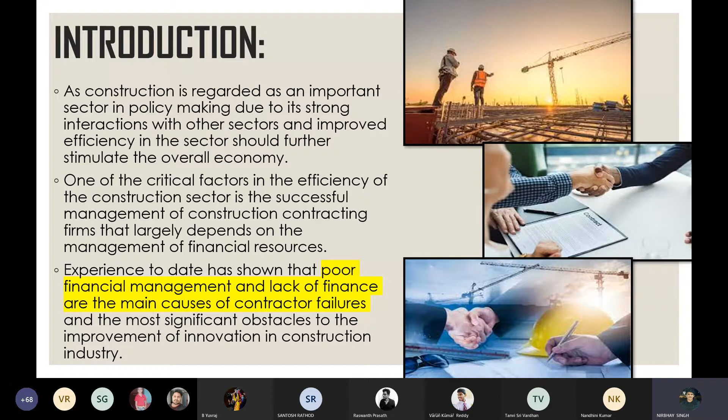As we all know, construction is regarded as an important sector in policy making due to its strong interaction with other sectors. Improved efficiency in a sector should in theory further stimulate the overall economy. One of the critical factors in the efficiency of construction sector is successful management of financial resources. Experience through various researchers shows that poor financial management and lack of finance are the main causes of contractor failures and the most significant obstacle to improvement of innovation in the construction industry.

Main external factors and internal capital sources in construction sector are debt and equity. Equity consists of funds subscribed in a project by shareholders and of retained profits. On the other hand, debt is mainly provided by commercial banks through instruments such as short, medium and long-term loans.

In research, it was found that financial sources in construction sector are limited compared to other sectors. They say that the risk of financial sources is less in construction industry, but on the contrast, some argue that construction has a higher average than other industries.

Why is it failing and what are the problems? There is a critical point: if a company does not make a profit, it will most likely fail. However, whether it makes a profit or loss, if it does not have a positive cash flow, it will absolutely fail. Why is that statement correct, and how are these problems affecting construction contracts management?

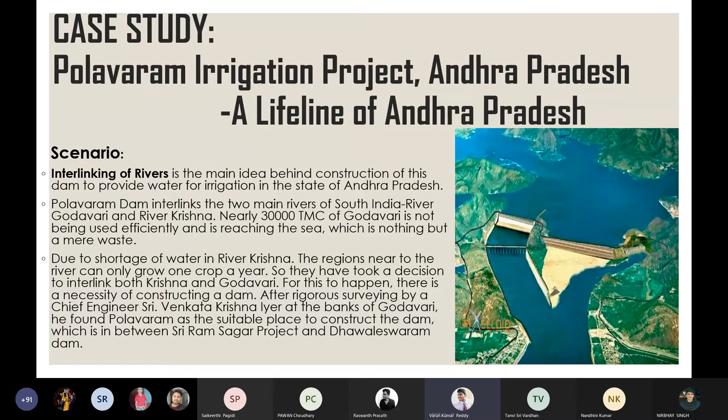After the construction of this dam, the aim is to transfer water mainly from the Godavari to the Krishna and flood all the low-lying areas to have water. In the year 1941, a chief civil engineer named Venkata Krishna Iyer surveyed a lot about a place in order to find the best site to construct a dam on the Godavari river.

He was able to identify one suitable place, that is Polavaram, which is 50 kilometers upstream to Dhawaleswaram project. Except this place, he couldn't find any other place on Godavari suitable for the construction of a dam.

Now we will look into the dam details. Till now, in any part of the world, dams are generally of one kind, but this dam is specifically of another kind. It is being constructed a little away from the original river course.

It has three main parts: the main dam, also called the spillway, the earth-cum rock-fill dam, short formed as ECRF, and canals. The spillway length is 1.1 kilometers with a total of 48 gates. Once the direction of the river is altered, the original river course is obstructed with the earth-cum rock-fill dam. This ECRF dam will not have any gates, it's just like a wall.

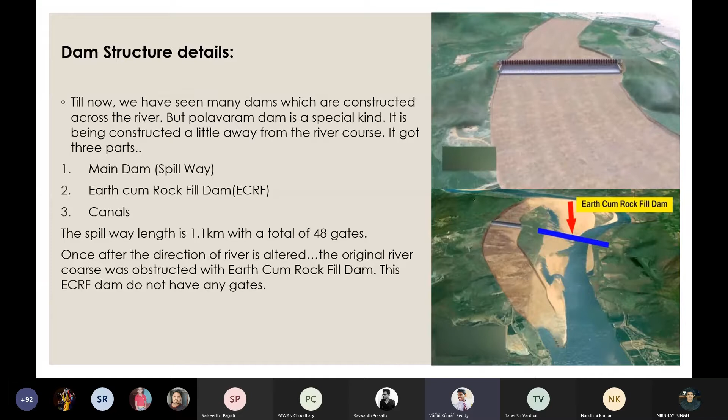Yeah, nearby, can you change the slide? Yeah, Nirbhay. I have changed it. Yeah, I got it now.

They decided to construct this dam at Polavaram. The estimated cost of this project was about 6.5 crores in the 1940s, as discussed earlier by the chief engineer named Iyer. It was named the Ramapada Sagar project in the early 1940s, but due to lack of funds, construction did not start at that time, and later it was renamed the Polavaram Irrigation Project.

Finally, in the year 2004, the then Chief Minister of Andhra Pradesh, Dr. YSR, started thinking of this project. The project estimation in 2004 was around 8,200 crores, which we can approximate to nearly 10,000 crores. The state government decided to build the project on its own.

They started canal works in 2004 and dam construction works in 2005. The dam construction came to a halt in May 2006 because the state government had not obtained clearances from the forest department and various other departments. Construction stopped until 2009, with only canal works completed. By 2009, the state government had obtained clearances from all the departments.

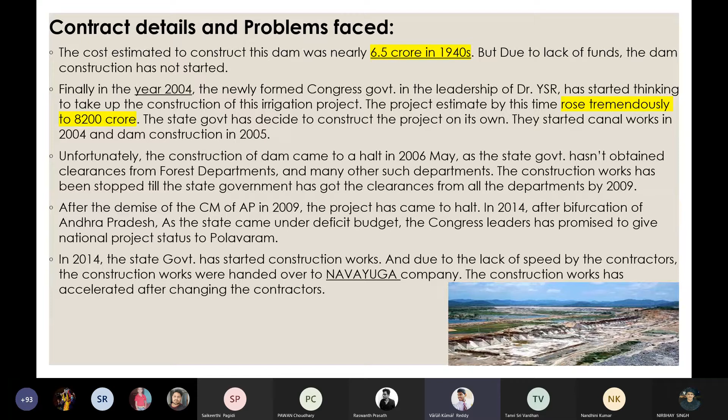In 2014, dam construction began after the bifurcation, and in 2015 the construction works were given to the Navayuga company, because the previous contractors were not working efficiently. The project construction accelerated after changing the contractors.

The spillway's length, as discussed, is 1.1 kilometers with a total of 48 gates. After the direction of the river is altered, the original river course is obstructed with the earth-cum rock-fill dam, which acts like a wall and doesn't have any gates. In the ECRF, once constructed, we can store water in the main dam. Otherwise, during floods, the water won't get stored in the spillway but will flow in the original river course direction, toward the ECRF dam. So to construct the ECRF dam, we should stop water coming in the river course direction, and only then will we be able to construct the dam.

To obstruct water for constructing the ECRF dam, coffer dams are constructed in the upstream and downstream. These coffer dams are just temporary structures that will be removed after the completion of the construction of the ECRF dam, which is an earth-cum rock-fill dam.

The reason for construction of the coffer dam in the upstream is to obstruct water from upstream, and the reason for construction of the coffer dam downstream is to obstruct water from the downstream through the sand. As the sand is pervious, water will seep through it and cause disturbance during the construction of the ECRF dam.

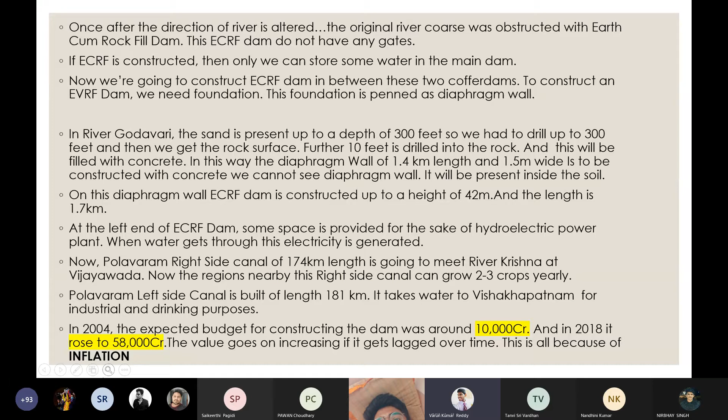In 2004, the expected budget for constructing the Polavaram Dam was 10,000 crores. Now in 2018, the budget has been drastically increased to 58,000 crores. The value gets increased every year as it becomes late, probably due to inflation.

Inflation plays a key role in estimating the cost of the project. Earlier, in the 1940s, it was nearly 6.5 crores, near to that. In 2004 it became 8,200 crores, and now in 2018 it has reached 58,000 crores.

Probably this is due to inflation and the cost increase in cement, cost increase in sand, and cost increase in labor. Each and everything has determined the increase in this amount of rate.

Now, the final proceedings after the 2019 elections: the state witnessed a new political party and the dynamic leadership of Sri Y.S. Jagan Mohan Reddy. It introduced a new version, that is reverse tendering, citing that the previous government had done many scams in the construction of the Polavaram project during their 5-year term, from 2014 to 2019.

After the reverse tendering, Mega Engineering Infrastructure Limited, in short MEIL, bagged the reverse tender with an offer of 4,358 crores, which was 12.6% lower than the previously cited bid of 4,987 crores.

The Polavaram project is intended to stabilize the ayacut and water supply for 2 crops a year, a maximum of 2 crops in a year. The project proposes to supply irrigation water for 7.2 lakh acres.

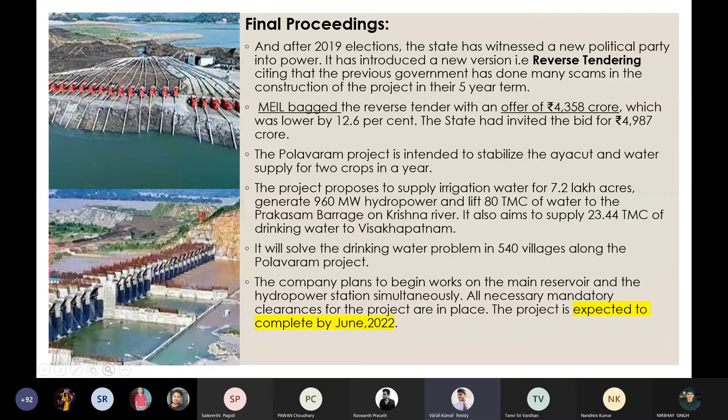Helps in irrigation. Already 23 lakh acres which are already getting irrigation water will now get adequate water for their crops. 80 TMC of water is being transferred to Krishna river and 23 to Vizag and nearby areas.

River Godavari has flooded at least once in 30 years. After construction of this dam, this dam has held all the flood water irrespective of the size of flood it got. The world's biggest dam, the Three Gorges Dam in China, has a capacity of 47 lakh cusecs of flood water, and this Polavaram project has a capacity of 50 lakh cusecs of flood water. That means it's more than that of the Three Gorges Dam.

Nearly 33,000 crores is required for rehabilitation and resettlement of people before construction of this project. And after completion of the project, even a drought of 4 years for Andhra Pradesh will have no difference in the water requirement for the state of Andhra Pradesh.

And now my friend Praneeth will discuss the summary and so on. Thank you.

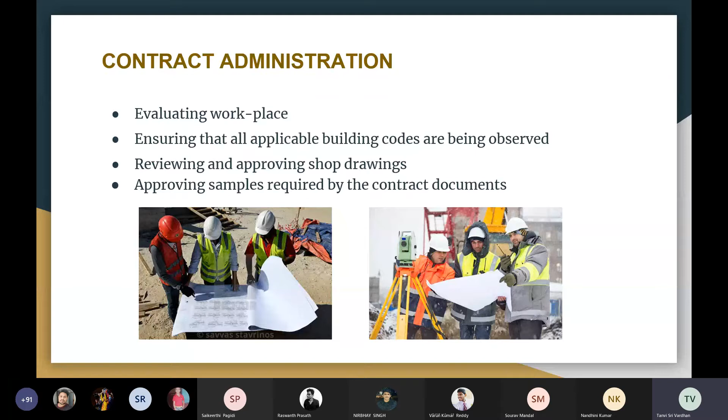Then approving and providing the samples and materials required as per the contract documents. Then reviewing and commenting on the changes made, refining the plan in a better way. Next is reviewing and amending the contractor's monthly requisition payment, fixing this up and then applying for payment. A payment application is a document that a contractor submits to get paid for their services.

Then in the process, obviously some issues may arise and changes have to be done, and all these changes have to be documented. That's what a change order does. A change order is a document that shows changes to the scope of work and the cost associated with the change. The owner and the contractor both must sign the change order, because the application will reflect the change in work and cost. Including the change orders gives the contractor and the owner a quick reference point to confirm that the money figures in the application are correct.

Next is periodic on-site visits during construction, conducting regular meetings with contractors, vendors, and subcontractors, looking over the progress, and keeping records up to date about all those changes made. And reviewing and commenting on contractor-proposed changes to the contract documents, which may increase or decrease the contract sum.

Next is supervising the project, ensuring that clients get the technical quality they expect and the project goals are met, and ensuring compliance with all guarantee and warranty requirements. We all know that guarantees and warranties emerge as a means of safeguarding the rights of customers. These are legal instruments, and with the strength of guarantees and warranties, the seller or manufacturer is liable to face judicial courts if they fail to fulfill the guarantees and warranties. They include information about free repairs, service information, and legal recourse.

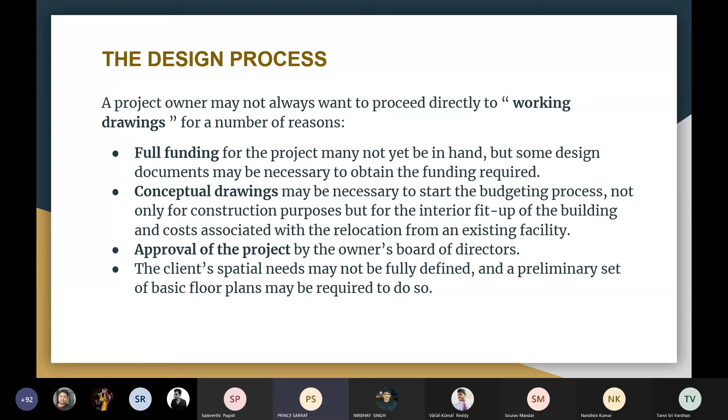Now I'm going to tell about the owner's role in the design process. An owner should take an active role in the design process to provide the design professional with the information they require to develop the project design. Some owners may not have experience in interpreting a two-dimensional design, all those lines on the drawing. If that is the case, ask the architect to explain which are which on the drawings.

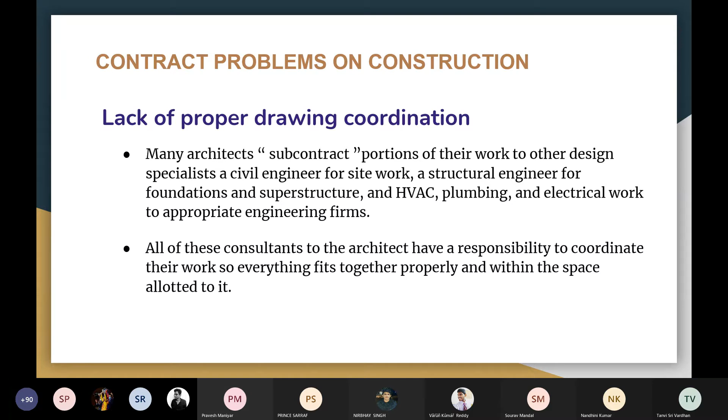Let us take a 14-story residential apartment building, where the architectural drawings had not been properly coordinated. The structural drawings of the post-tension concrete slabs on each floor, prepared by the structural designer, contained overall floor dimensions that differed from the architectural drawings. The edge of the concrete slabs on each floor extended beyond the facade of the building. Clearly, this is an example of total lack of coordination between architect and engineers.

These errors spilled over to the mechanical and electrical trades, since all of their vertical shaft openings, designed to carry electrical conduits, air conditioning and heating ducts, water lines, and fire protection lines, were designed according to the architectural drawing.

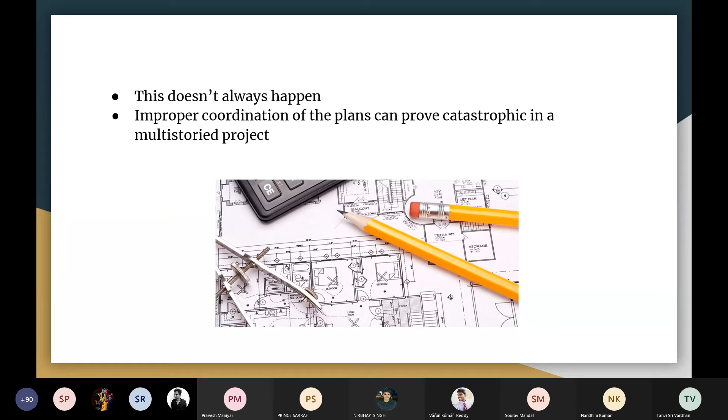Next problem: inadequate administration of the project. Inadequate administration can go up or down the line, and when it is spotted, it must be quickly changed. The owner has the responsibility to respond to questions from the architect, the design team, and the contractor. A clear chain of command should be established so certain decisions can be made in the field, while others require home office review and approval.

Contractors get very upset when their progress payments are overdue. Prompt payment is important to contractors, who in turn must pay their subcontractors promptly so they can demand service when required. If the owner's funds are not available, the contractor may have to extend a credit line that may already be extended too far. An important owner responsibility is to review, approve, and process contractor requests for payment within a reasonable period of time. The project team proposed by the general contractor, whose experiences look good on paper, may turn out not to be so good.

Answers to questions never seem to come when promised, and when they do, they are incomplete and not up to the mark. A watchful eye must be kept on the architect's or engineer's processing of important documents, change orders, requests for information, and payment requests, and the owner must ensure that the design consultants are performing in a timely and professional manner.

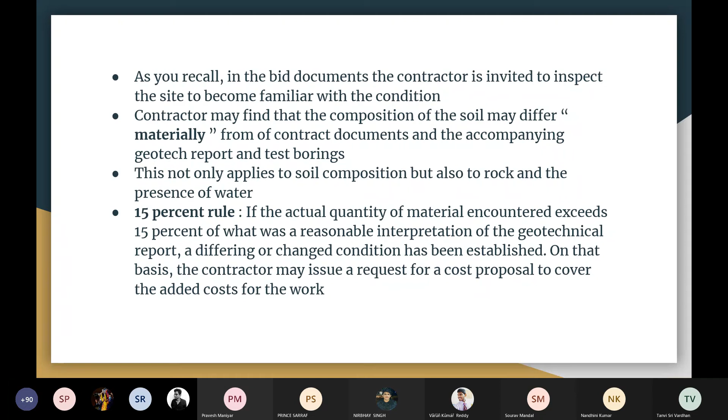My topic is unforeseen subsurface conditions. Unforeseen means that which we can't expect, so unforeseen conditions are most commonly found in remodeling works and subsurface works, like excavations and mining. In other words, unforeseen conditions are unusual situations which are not reasonably anticipated based on the contract documents. For these situations, contractors are not awarded any damages unless they rise to the level of practical impossibility and commercial senselessness, or there is contract language transferring risk.

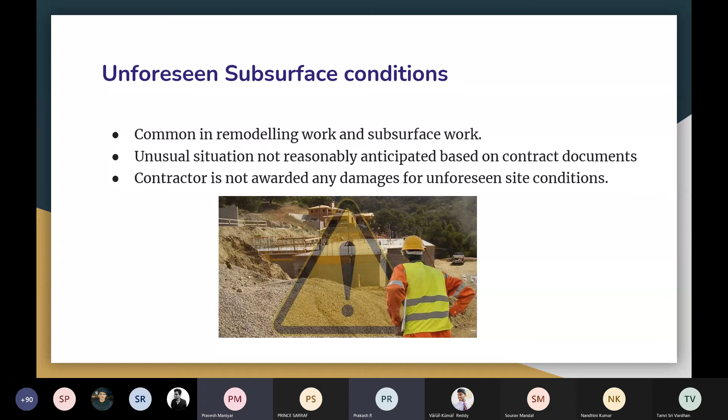These conditions never include weather conditions, market factors, economic conditions, etc. The owners are liable under the following three conditions: the risk transfer clause, which has three rules - the condition is unknown to the contractor, the condition is unusual, and the condition is materially different. The next is practical impossibility, and the last one is a tort claim raised.

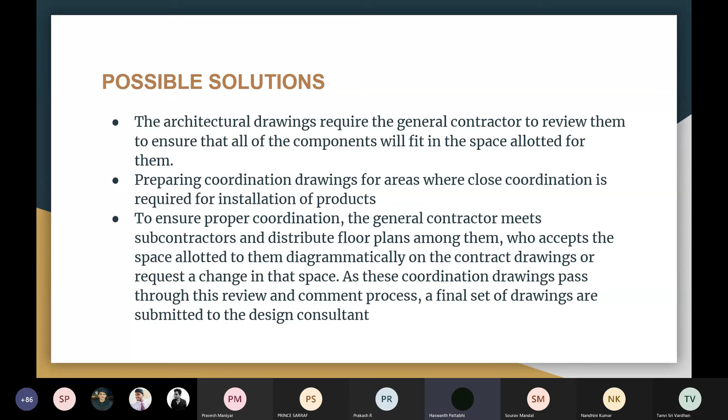In other instances, major coordination problems that require shifting partition locations or lowering ceiling heights to unacceptable levels can create serious problems. The general contractor usually has a contract obligation to perform normal coordination work, and this requirement is usually included in the contract specifications, directing the general contractor to perform a number of procedures. General procedures include preparing coordination drawings for areas where close coordination is required for installation of products, material fabricated off-site by separate entities, and where limited space necessitates maximum utilization for efficient installation of different components.

The owner's representative must be the watchdog in these matters. If delays go unaddressed, he or she must advise the concerned party that they will be responsible. Although others are hired to supervise, monitor, and oversee the construction process, an owner must stay close to the action, because if they don't, there will be a lot of finger pointing, and owners have to pay for the losses.

Establish an environment of trust between owner and contractor, which also involves the owner's design consultants if they appear too aggressive in their relationship with the contractor. Establish an environment of reasonableness and fairness, not only with the general contractor but with the subcontractors. As the saying goes, walk a mile in the other person's shoes. Avoid the blame game and recognize that some portion of the problem may lie with the owners and design consultants. Resolve disputes as quickly and as equitably as possible. The longer a dispute remains open, the more hardened the positions become, forming barriers to resolution.

When site conditions differ materially, the contractor should alert the owner's representative so they can observe these conditions and comment on them as they are occurring, rather than after the removal of different materials has taken place.